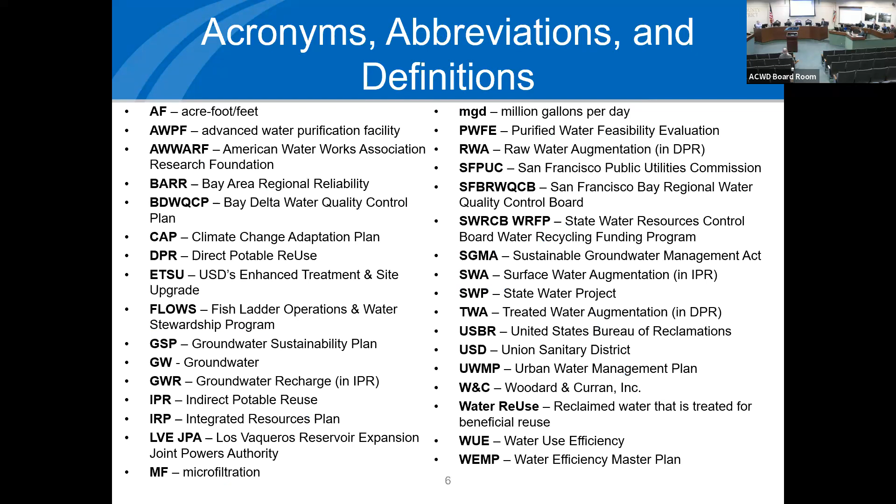And on the next slide, number 6 includes a list of acronyms you may hear today for quick reference as needed. To cover our first topic tonight on the Los Vaqueros project, I'm pleased to turn it over to my colleague, John Wunderlich, Director of Finance and Administration, and the district's alternate to the Los Vaqueros Reservoir Joint Powers Authority.

Great, thank you, Ms. Hidas. Good evening, or good afternoon, members of the board, staff, and public. I'm pleased to speak with you about this project and provide some updates on where we're at. So, if we can go to the next slide.

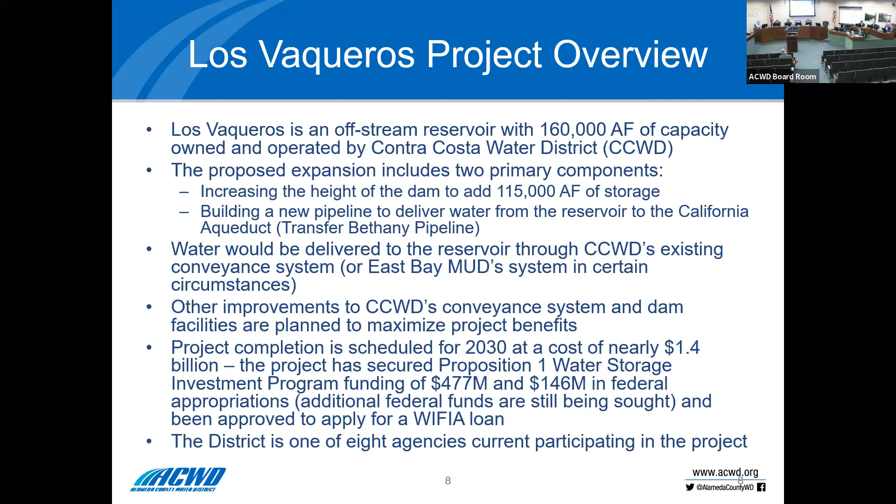Maybe we'll go one more slide, so we're looking at a graphic a little bit while I talk through it.

Basically, the Los Vaqueros Reservoir is an off-stream reservoir owned and operated by the Contra Costa Water District. It currently holds 160,000 acre feet of water. Essentially, the project is proposing to increase the size of the reservoir from 160,000 acre feet to 275,000 acre feet. The district is one of several partners participating in this project.

Essentially, the way it would work is that partners would use Contra Costa's existing conveyance system, as well as, in some circumstances, East Bay Municipal Utility District's existing conveyance system, to take water and put it into the reservoir and then also take delivery of it. The two major components of the project are, of course, the increase in reservoir size, increasing the dam height to store more water.

The second major component of the project is a new conveyance facility, the Transfer Bethany pipeline, that would take water from the reservoir, represented by the green arrow on the graphic here, down toward the California Aqueduct.

It would connect right above the Bethany Reservoir, but below the Banks pumping plant, which is critical because the ability to use that water would not be governed by restrictions at the Banks pumping plant.

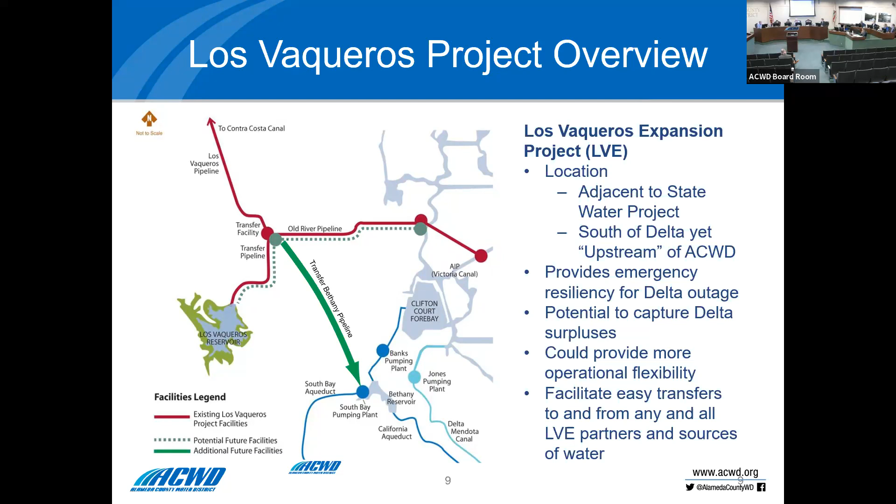So it's a great regional project that provides a lot of opportunities. Next slide.

So what we've done is formalize the governance of the project with those other partners. About 1.5 years ago, a joint powers authority was created, and it meets monthly. Board President Sethy is the district's representative to that JPA.

The JPA also has committees that are evaluating key issues for the formation of the project, and the district is represented on 2 of those committees. Director Sethy also serves as the treasurer of the JPA and is on the finance committee.

And I represent the district on the operations and engineering committee.

Last year, Taryn Ravazzini was appointed as the executive director. She's a consultant to the JPA; the JPA itself does not have any direct employees.

The JPA is currently in the process of really staffing up the support for Taryn in her role as executive director, and in particular we're looking for some program management consultants to come on board soon.

That will provide a lot of expertise and support for the engineering and operational aspects of the project, and specifically in overseeing the work done by Contra Costa Water District.

Where I'm going to focus most of today's discussion of the Los Vaqueros project is on all these different agreements and contracts essentially that are being developed, because before anybody's willing to go and spend big money on developing this — which is in excess of a $1 billion project —

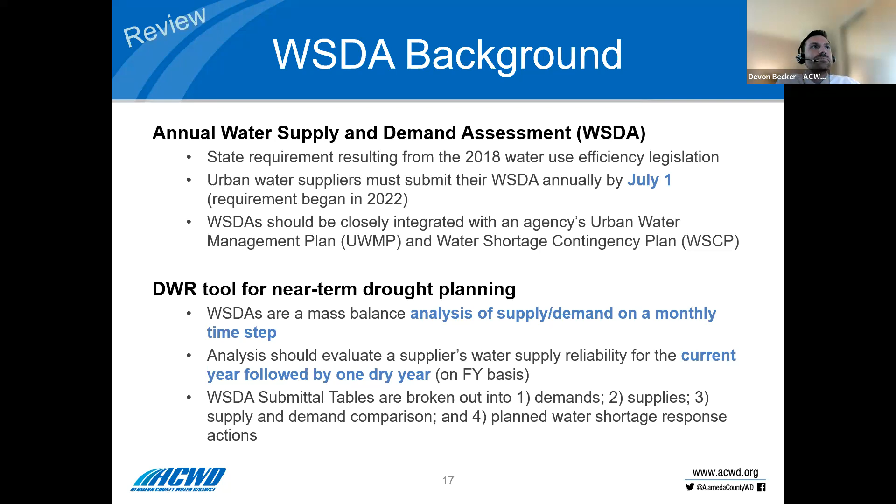Just a little bit more background on the WSDA methodology. The procedure for compiling the WSDA is outlined in our water shortage contingency plan, which was last updated in 2020.

We use existing modeling tools. ACWD uses our production optimization model, which is a 2-year model that incorporates unconstrained demand forecast, our current water supplies and constraints, and a subsequent dry year water supply and constraint scenario. We take that from our most recent UWMP single critical dry year, which in this case is 1977.

The production optimization model incorporates infrastructure capabilities and constraints, and it starts with initial groundwater conditions, then simulates those conditions on a monthly time step throughout the model. Lastly, WSDA methodology has us rely on our water shortage contingency plan for any shortage response actions corresponding to a shortage level.

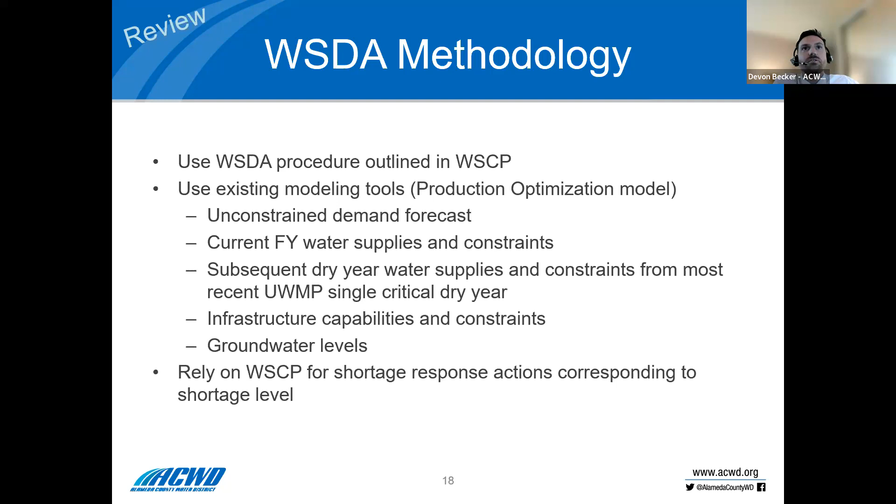So this is maybe the most important slide. The WSDA is really just a compliance requirement for ACWD. We do not use it as a planning tool. As Mr. Nizer mentioned, this is just a stress test, and the requirements dictate the use of hypothetical data assumptions.

So the idea is that this next fiscal year is going to mimic 1977 water supply conditions, when we know right now, looking forward, that's certainly not the case. We have 100% Table A allocation for this calendar year, a full San Francisco system, and our local groundwater basin is also full. So we know that this next fiscal year will not look like 1977, and yet that's what we're required to do for this analysis.

So just to reemphasize in a different way, ACWD's near-term water supply planning is far more realistic and informed, and that's what we use internally. Typically the WSDA analysis is presented at the Water Resources and Conservation Committee, with the general manager authorized to approve the report prior to submission to DWR.

So this is a busy slide, apologies. This is a snapshot from the draft analysis for the report submitted to DWR. On the top you see potable water shortage assessment, and this is for the following fiscal year if 1977 water supply conditions were to recur, which we know they're not.

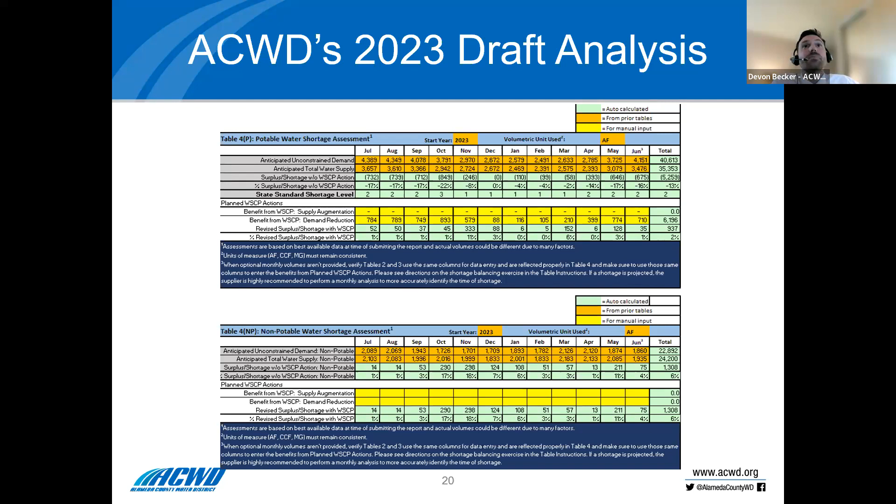So our draft results, just to summarize: there are no water shortage response actions required for 2023. The table we just looked at was for the following fiscal year, but I will say, and this is no surprise based on our current water supply situation, through the end of this current fiscal year we do not anticipate any shortage whatsoever.

As outlined in our 2020 water shortage contingency plan, the results of the WSDA will only trigger actions under the following circumstances. If a shortage is identified for current year conditions, fiscal year 22-23, then the procedures outlined in the district's water shortage contingency plan for that level of shortage will be followed. Otherwise, no actions will be triggered. Since we don't have any shortage through the end of this current fiscal year, we don't have any shortage actions that we need to put in place.

That's no surprise. The second bullet on this slide reiterates the table results we saw: for the following fiscal year, 23-24, the 1977 water supply reliability or availability would result in a 13% shortage. Our stage 2 actions would be sufficient to avoid a shortfall. But again, we're not required to do anything based on that analysis. All we have to do is submit those tables to DWR for compliance this year. So, next slide.

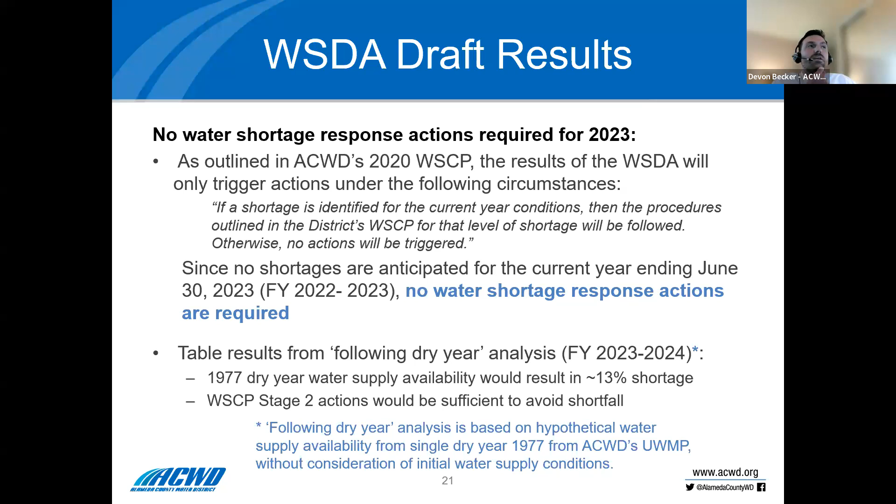This is the last slide, showing the next steps. Staff will finalize the WSDA analysis and present it to the general manager for approval, and then we will submit the WSDA report to DWR by the July 1st, 2023 deadline. With that, I conclude the presentation this evening, and I'm happy to take any questions.

Thank you, Mr. Becker. Wish you well on whatever new pursuit you're going after. We'll miss you.

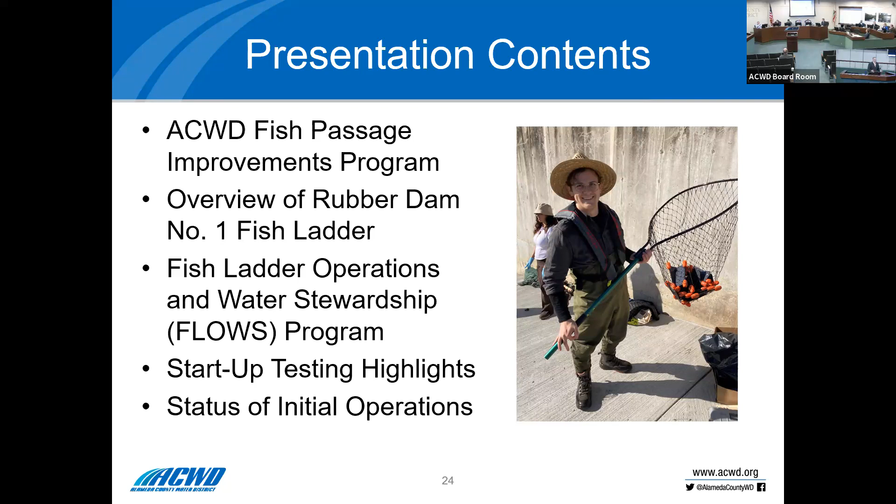A brief review of our fish passage improvements program, as well as a more detailed overview of the Rubber Dam #1 fish ladder. Then we'll transition over to Ms. Oshiro, who will provide a summary of the fish ladder operations and water stewardship, or FLOWS program. And then we'll close it out with some highlights from our startup testing and the latest from our initial year of operations.

So as a brief overview, more for the public than for those in this room, I wanted to provide context for these projects. What you see in green as well as white, outlined in black line work, is the Alameda Creek watershed. After the Sacramento and San Joaquin watersheds that feed through the Delta, this is the largest watershed feeding into the San Francisco Bay. 633 square miles extending from Contra Costa County down to Santa Clara County, and east you'll have to drive through the Altamont Pass to get out of our watershed. It covers a wide range of terrain, from completely undeveloped land and ranch land, to significant residential development in the northern part of the watershed.

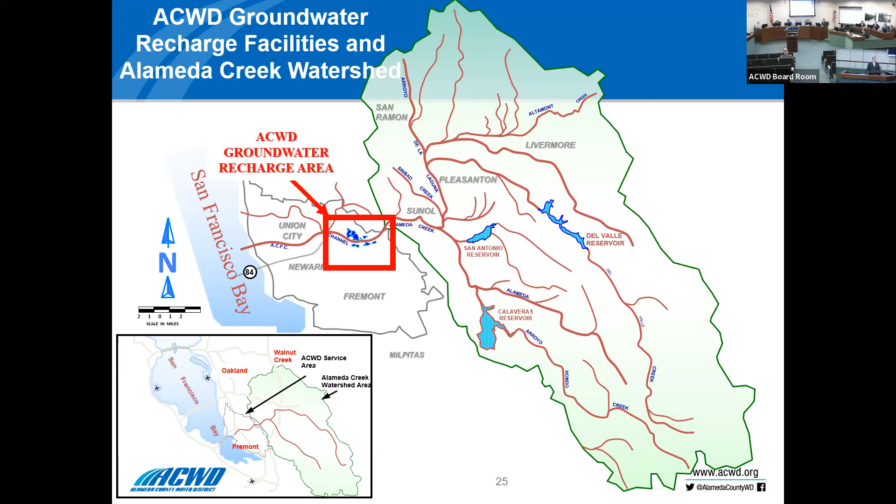With the next slide, I want to provide an overview of why Alameda Creek is important to the water district. Being on the creek, I hear this question quite a bit from customers and trail users: what's the connection between the water district and fish passage facilities in the creek? Alameda County Water District gets 40% of our water supply portfolio from local supplies, namely from the Alameda Creek watershed. In general terms, about 30% of that we pump from our groundwater, and about 10% is local supplies we get through water rights at Lake Del Valle.

Also, the water is critical for our replenishment of the Niles Cone groundwater basin, and the creek itself provides the public with several opportunities for recreation, habitat for wildlife, critical flood control, which we saw this winter was very beneficial to our service area. And it provides an aesthetic and environmental value.

It's part of the Water District's mission statement to be a good steward of the environment, and that's why we're a proud founding member of the Alameda Creek Fisheries Restoration Work Group. Our objective in participating in the work group is to support that fisheries restoration while ensuring reliability of our critical water supplies. Overall, the Fish Passage Improvements Program is not just one project, it's several projects that have spanned many years.

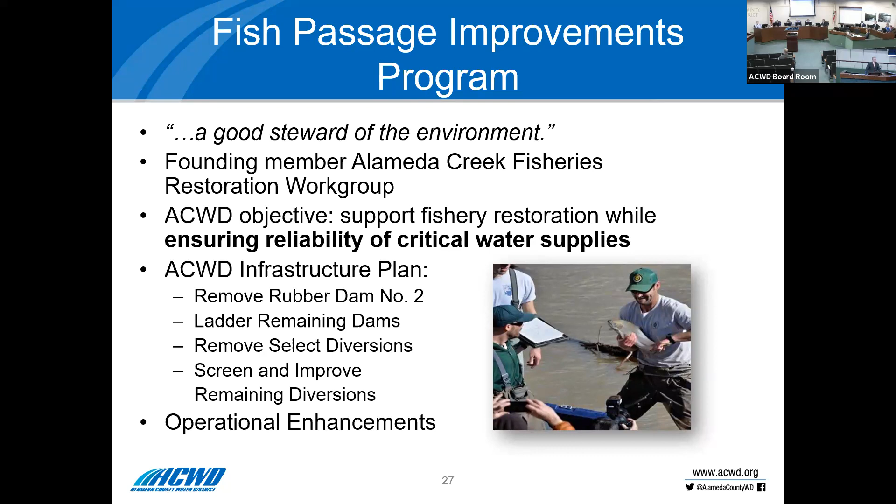We're finally at the point where we can put the capstone on this program, with the completion of the Shinn screened diversions, as well as the Rubber Dam #1 BART weir fish ladder. It is our hope that through these new facilities and screened diversions, we'll be able to provide some operational enhancements that will ensure the reliability of those local supplies well into the future.

I'll give a very brief overview of the conditions before construction of Rubber Dam #1 and the drop structure, the BART drop structure ladder. Going from left to right, you'll see the BART train tracks, that bridge that crosses the creek, and Alameda County Flood Control's drop structure, comprised of a 22-degree slope that's 9 feet high and 40 feet long.

At the bottom of that slope are what we affectionately call the Dragon's Teeth, 4-foot high energy dissipators that are used to slow the flow of water, dissipating the energy before that high flow of water reaches the piers that support the BART bridge and tracks.

Lastly, I should mention Rubber Dam #1 is towards the right. That dam is inflated, creating an impoundment that then allows us to do diversions of our local supplies through screened diversions upstream.

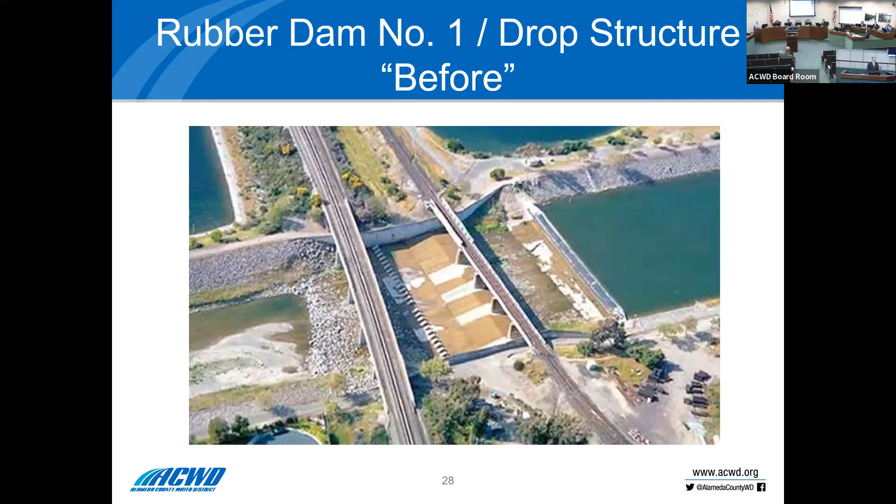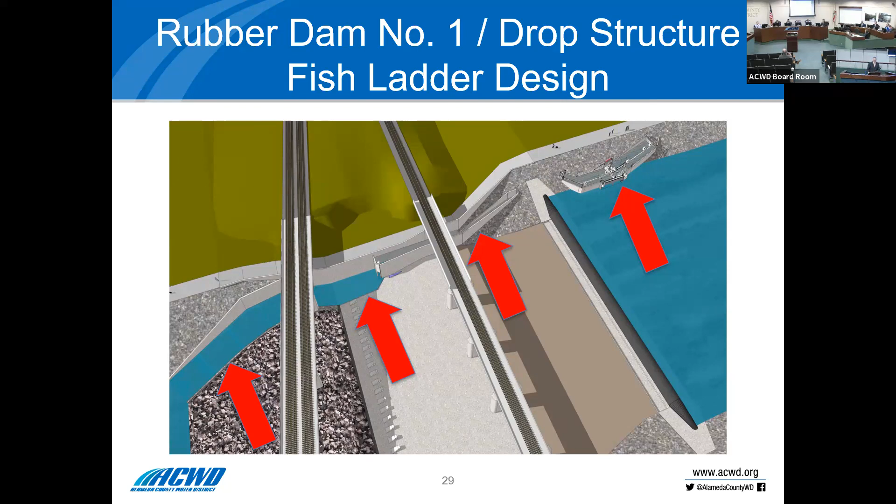A lot of the terminology I'll be using today regarding exits and entrances is from the vantage point of an in-migratory fish, an adult fish swimming up into the watershed. So it's very confusing, but I just wanted to provide that caveat.

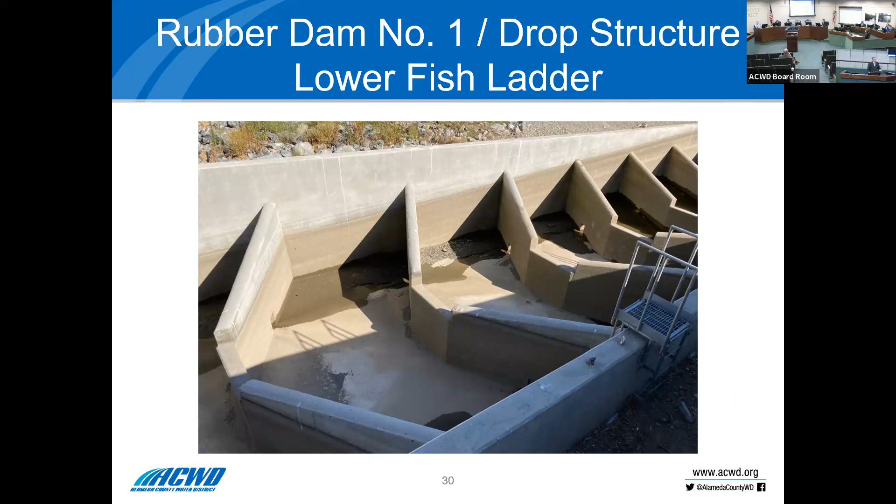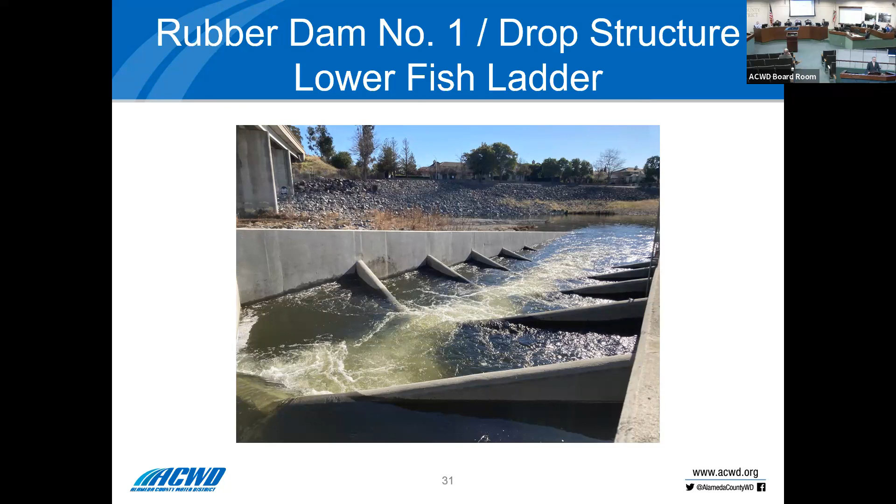I'll start with the lower fish ladder. This is a vortex pool and chute design, a very passive structure. There are no valves that need to be operated, and there's no monitoring equipment in this portion of the facility. When it's filled with water, it provides a cascade of 1-foot drops that allow water to flow downstream and in-migrant fish to easily pass through a wide range of flow conditions.

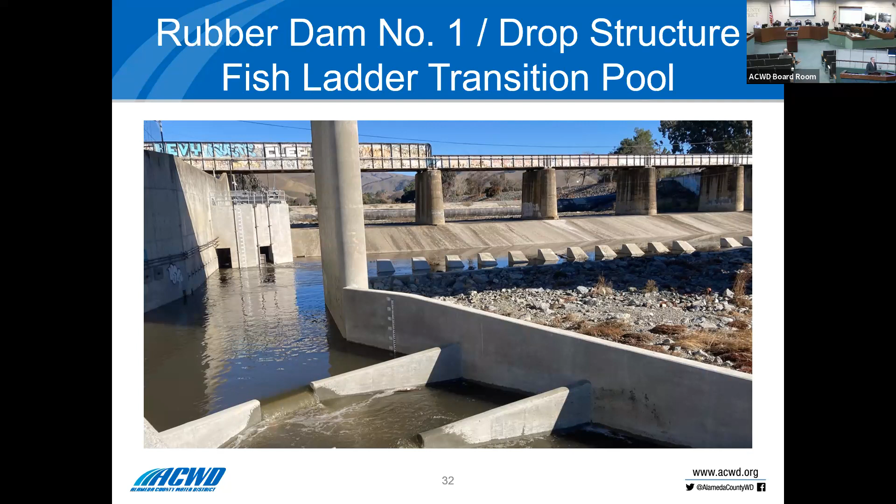I want to highlight the transition pool that's located between the upper and lower fishways. That transition pool provides a low flow channel, and in higher flows, as you can see in this photo, water can actually span the entire width of the flood control channel in that general area where the Dragon's Teeth are located.

This is the most complex portion of the fish ladder, so I really wanted to provide a more detailed view into the ladder. It's very difficult for members of the public to understand this facility. If you're standing on top of it, you just see a bunch of grating. If you're standing on the opposite side of the creek, all you see is a lot of concrete.

So what I provided here along the top is sort of a cutaway profile of what the upper portion of the fish ladder looks like if you were to basically saw it in half. The photo underneath just shows the concrete walls. Again, if you're on the opposite side of the creek, you don't see much. The concrete walls are sort of that tan color in the profile at the top.

The black oval is Rubber Dam #1. You can see that part of this ladder is located downstream of RD1 and part of it is upstream of RD1. The black line that you see generally towards the top is the grating, so as you walk along the top of the ladder, there are some portions where the grating goes down behind a concrete wall.

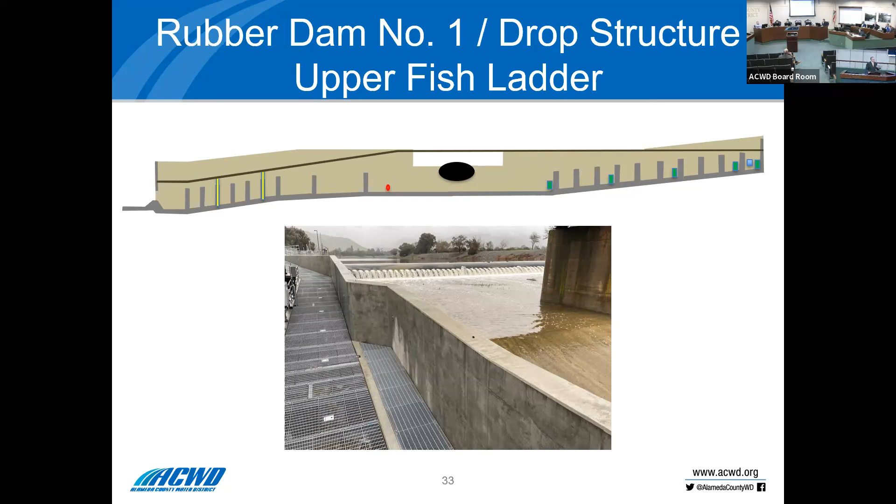With the next slide, I wanted to highlight the vertical slots. The stairs or steps within this ladder are created through hydraulic design so that each pool provides a 1-foot head drop from one pool to the next. And the way that it achieves that is through these vertical slots. So there are 2 concrete walls with a 1-foot gap between them, and water flows at a range of flows through there, providing the maximum hydraulic jump of 1 foot, which allows in-migrant steelhead and in-migrant salmon to swim upstream.

If you could just go back 1 second, I did want to highlight those blue-green rectangles towards the right of the profile. Those represent the locations of the exit gates, and those exit gates allow us to operate this ladder at a range of impoundment levels. So if the impoundment is completely full, we'll have the rightmost upstream exit gate open. If you think of an extension ladder you have at home, fully extended — it's a concrete facility, so it's very hard to move around easily. So instead we have a fixed structure, but multiple top rungs of the ladder.

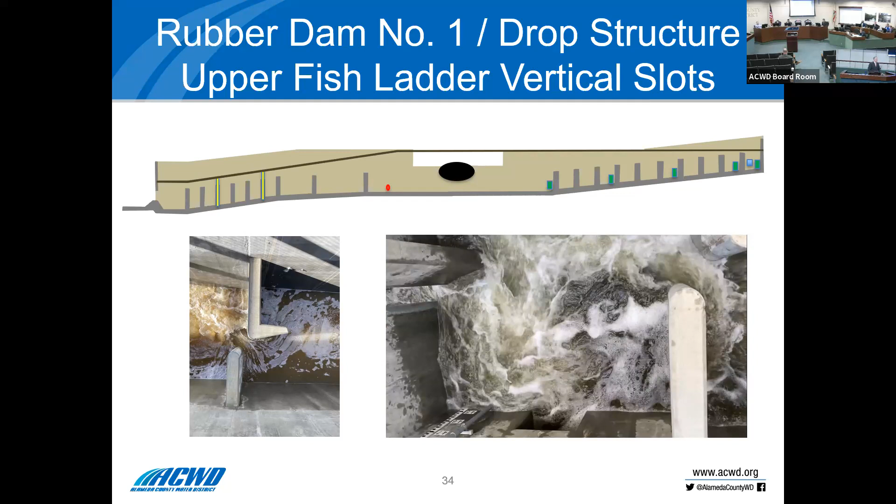And then exit gate number 1, which is the 5th from the right, is the lowest exit gate that we can operate. So again, this allows us to operate from a completely full impoundment down to no impoundment at all. The dam could be completely deflated and that upper fish ladder can still be functional to provide for passage.

With this next slide, I wanted to highlight some of our monitored equipment. This monitoring equipment is exclusive to just this fish ladder — we don't have this equipment in our fish ladder at RD3. What you see with that red circle just downstream of the black oval representing RD1, that's the approximate location of a sonar camera. So we have a sonar camera down towards the bottom of that pool, and that provides the ability to capture sonar video that we can later post-process and collect imagery of fish passing through the facility.

And then what you see with those yellow bars towards the left of the profile, those represent the 2 locations where we have 2 sets of pit tag antennas. These are antenna loops. The photo on the left shows the upper loop, which extends from the top of those concrete walls that create that vertical slot, all the way up to the top of the grating and from wall to wall. So that's a complete loop around that opening.

So at very high flow conditions, water is actually over the top of the concrete walls and water is flowing through that upper loop. Now we also have the lower loop — it's a little harder to see because the photo is taken directly down looking at that vertical slot. But that lower loop fully encircles that vertical slot, extending from the very floor of the pool along both sides of that 1-foot opening and then along the top of the wall.

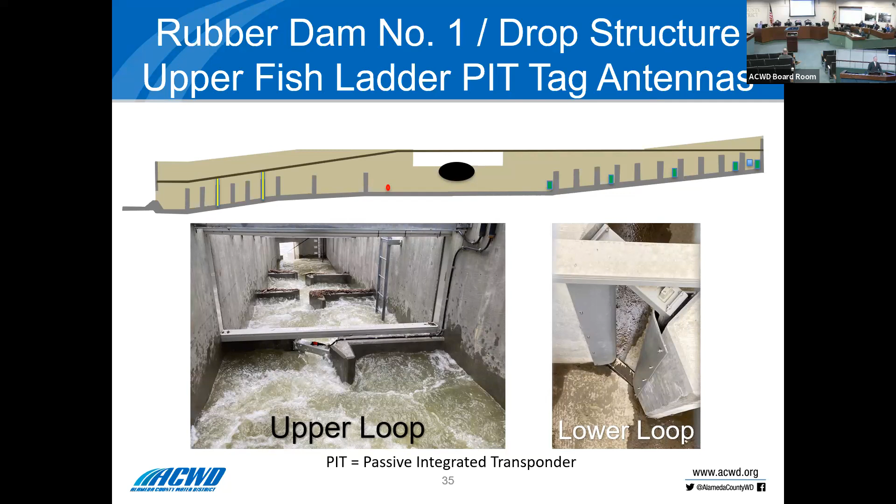With the next slide, I wanted to highlight what the loops are for. On the lower right, you see a photo of a 12 millimeter glass capsule, and inside of that is a bunch of technology, but it's basically a passive transponder. When it passes through an electromagnetic field created by our antenna, that transponder emits a unique identifier that is captured by the antenna and recorded by a computer and then uploaded to the cloud. So from my phone, I can keep an eye on whether there are tags being detected by our antenna, and of course we have a database, so we can always go back.

I'm not looking at my phone all the time. Can I get that app for my Christmas present? We're gonna collect the data.

We'll have an annual report, so I'll give you a one-year snapshot. But as you know, with the press release, we were able to detect the first passage of a pit tag that wasn't a test tag that went through that antenna. I'll get into that later.

The San Francisco Public Utilities Commission, or SFPUC, conducts annual electrofishing surveys across many locations in the upper watershed that's in their jurisdiction. They record the number of fish and the variety of species they collect during those surveys. The electrofishing stuns the fish for a brief period of time, during which they can collect and count them.

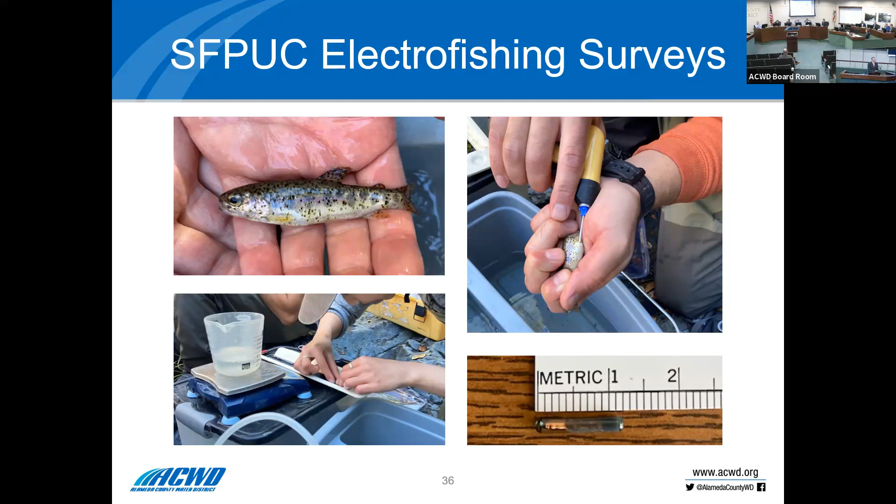For the next portion to talk about our flows program, I'll turn it over to Ms. Kelsi Oshiro, who will explain the flows program. Great, thank you, Mr. Ash.

So just a brief overview of our FLOWS program. FLOWS stands for Fish Ladder Operations and Water Stewardship. The goal is to enhance fish passage in Alameda Creek while maintaining water supply goals on an ongoing basis. ACWD will operate, monitor, and adaptively manage creek facilities in accordance with the biological opinion, or BO, and coordinate program activities with other watershed stakeholders.

This slide has the flow program elements. The first is compliance, which includes compliance with our daily bypass flows, operations of our fish ladders and screens, development and implementation of our adaptive management plan, performing monitoring activities, and submitting annual reports to regulators and grantors per our biological opinion.

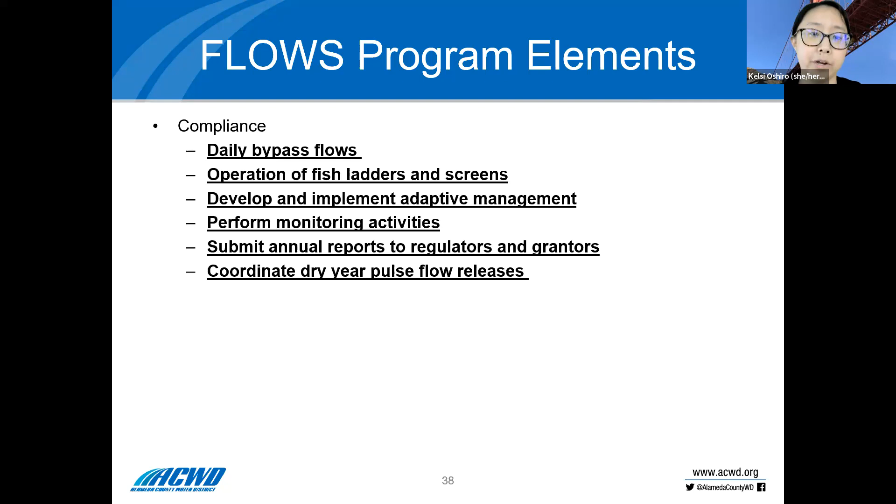Part of that is also coordinating dry year pulse flow releases. Other aspects of the flow program elements include coordination with our watershed stakeholders and regulators for our watershed activities, and we also have a cost share with the flood control district.

For the creek-related community engagement, which is also a large part of our FLOWS program, that includes public education and outreach, as well as participating in community events.

Here's a list of our program elements—I'm not going to read through all of them, but just highlighting that there are several components to the FLOWS program, like previously mentioned, with several reporting requirements as well as testing. Today we're going to dive into a couple of highlights of this program, running through some of our exciting experiences and developments in preparation for startup of operations, as well as what's been happening this first quarter, as Mr. Ash mentioned briefly.

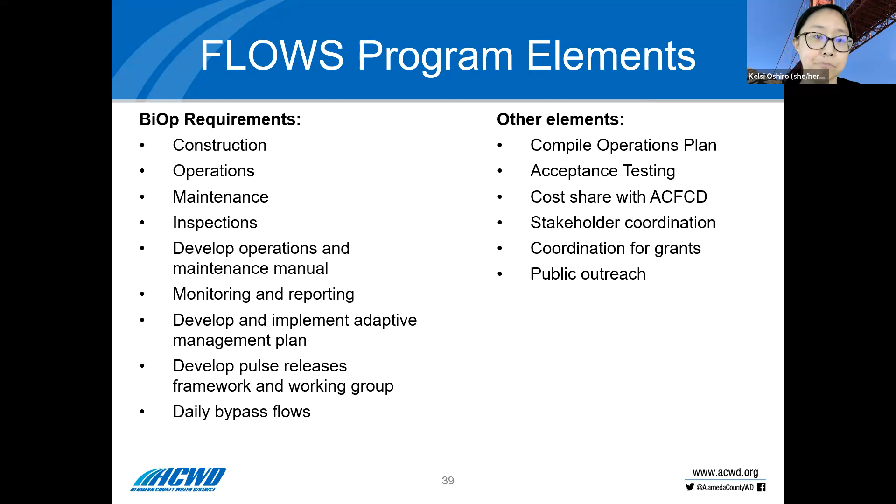Prior to operation, we did startup testing as part of our FLOWS program. The purpose of this startup testing for the fish ladders was to gain operational familiarity with the system controls, operations, as well as our safety protocols, and confirming that our monitoring equipment was properly calibrated. This began as soon as we could, at the end of November 2022, and continued throughout December as well.

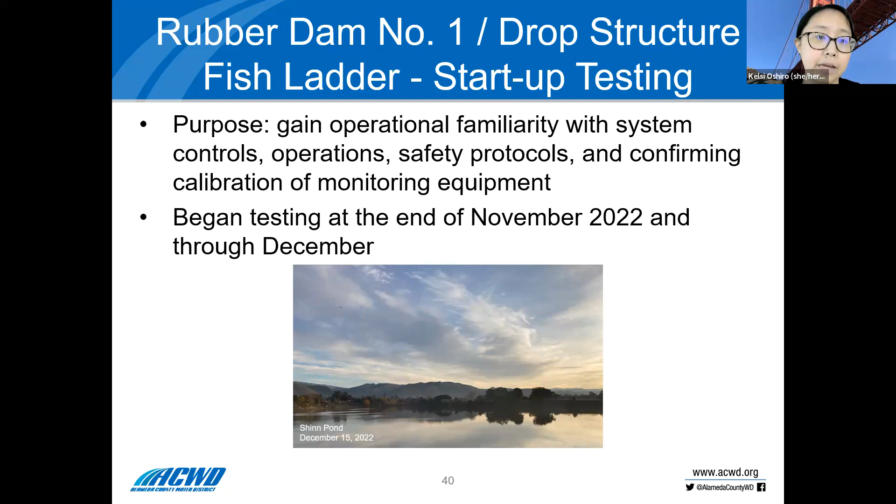As part of the startup testing, one of the very important aspects was making sure that fish passage was being allowed through our fish ladders. This included two important components: head drop measurements and velocity measurements. For the head drop measurements, we wanted to be sure fish could pass safely through the different pools and that the head drop wasn't too large. We simulated high and low flows throughout the fish ladder, collected across a range of flow conditions possible for fish.

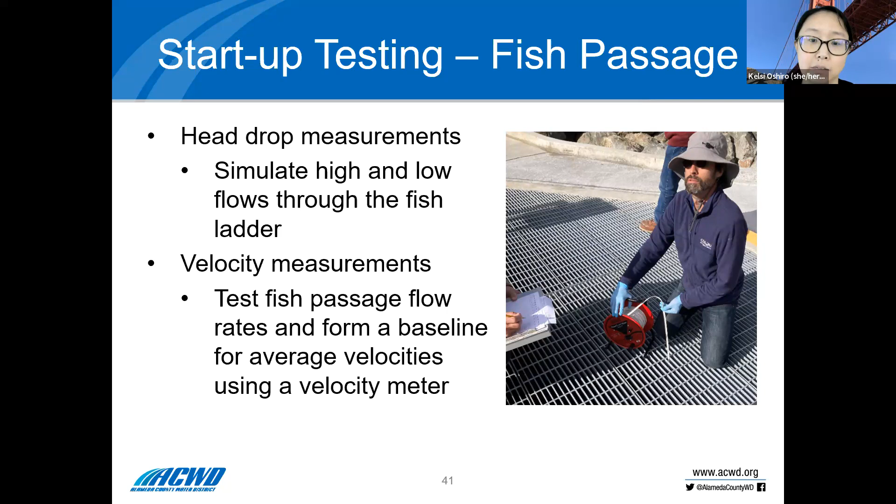Juvenile spillway was also tested. Similarly, velocity measurements were tested, forming a baseline for average velocities within the fish passageways, using a velocity meter. Here to the right, we see our own ACWD staff, Jeremy, assisting with these tests.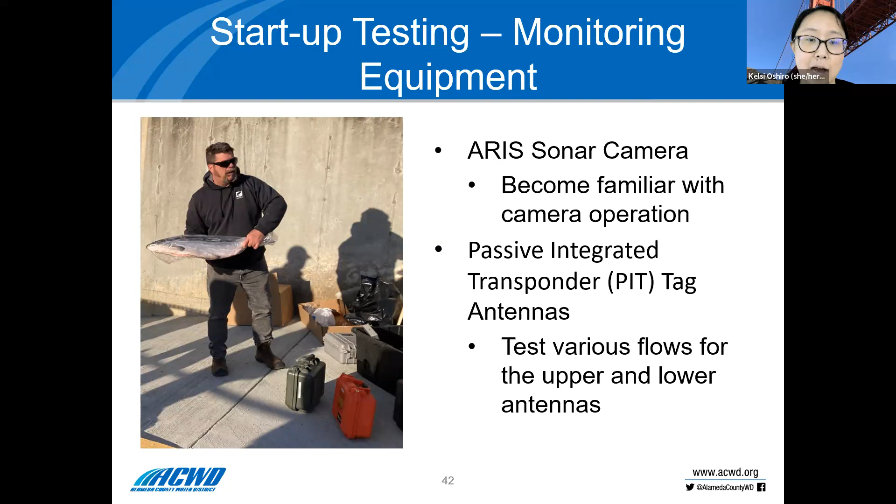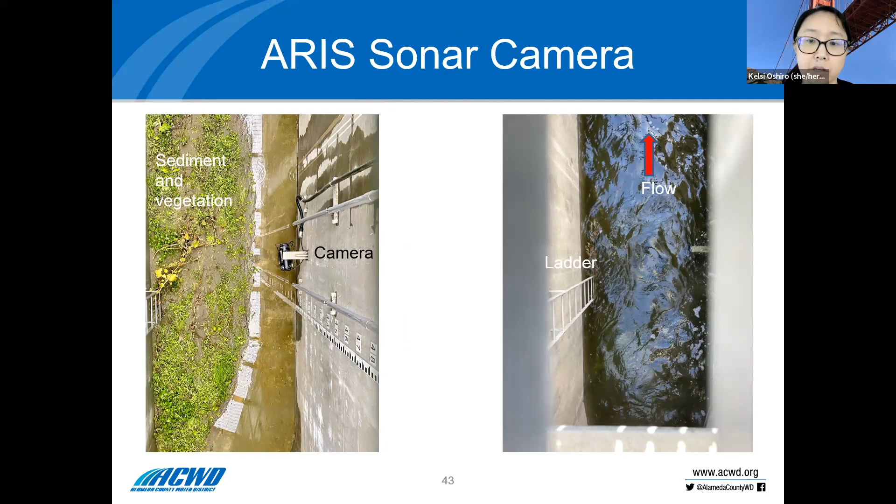A little more detail about the ARIS sonar cameras: here to the left, you see the camera without any flow going through the fish ladder, and to the right, the fish ladder with flow. You see the same ladder on your left, and then the camera currently submerged.

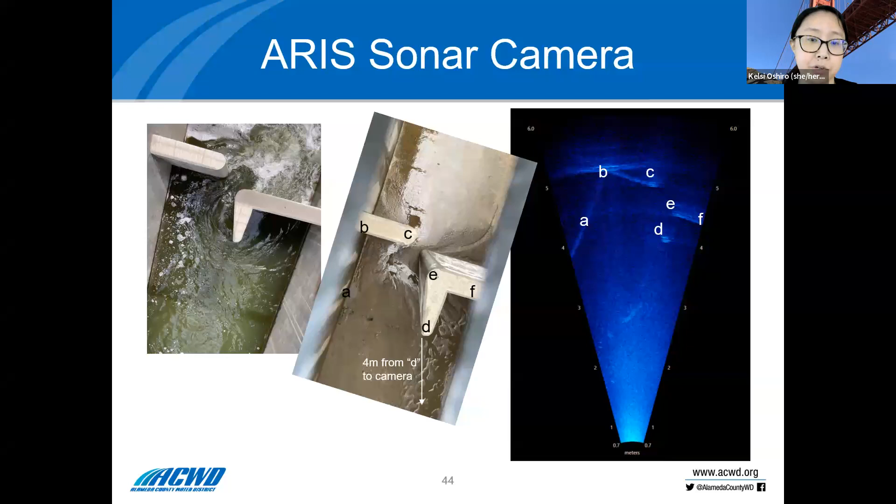Later in this presentation, we'll show a couple of exciting clips from our sonar camera footage. But to orient ourselves here, on the very left-hand side we have a vertical slot, and the picture in the middle has a letter A, which is a little hard to see but marks where the floor level of the fish ladder meets the wall. Going from left to right we have B and C, then D, E, and F on the right-hand side. Point D is about 4 meters from the camera. On this right-hand image, you'll see the corresponding letters A through F, which should help orient us when we get to the videos we'll show you soon.

These were the market fish used for testing of the ARIS sonar camera. A couple of items we use here: you see the float, which keeps the fish oriented and off the channel bottom, and a stadia rod used for taking water depths and holding the weight in place. The larger fish is an Atlantic salmon bought at the market, and the smaller fish on the bottom of the photo is a striped bass. We also have an 8-ounce weight, and we used an aluminum can for the testing as well.

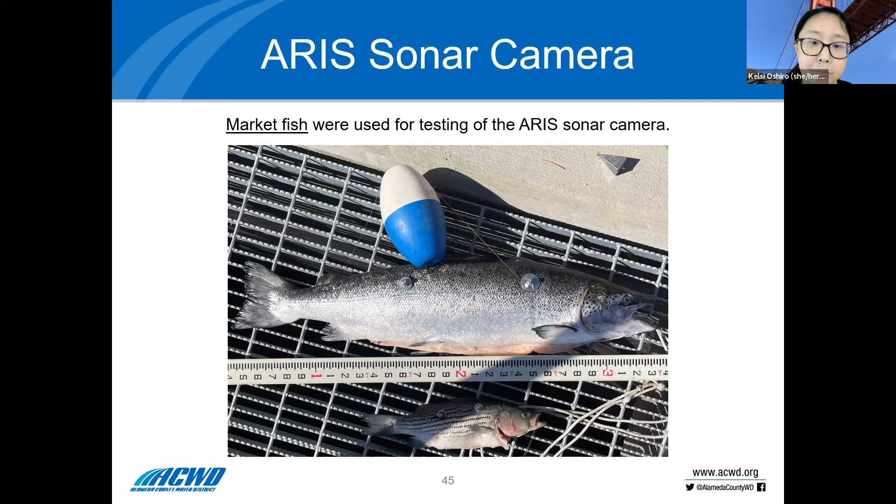This is a bit more orientation for the sonar camera image. You'll see that the Atlantic salmon marker fish has bolts going through it, and here at the top left corner, you'll see the corresponding bolts pointed out with the arrows. You can kind of see the outline of the fish in the image as well.

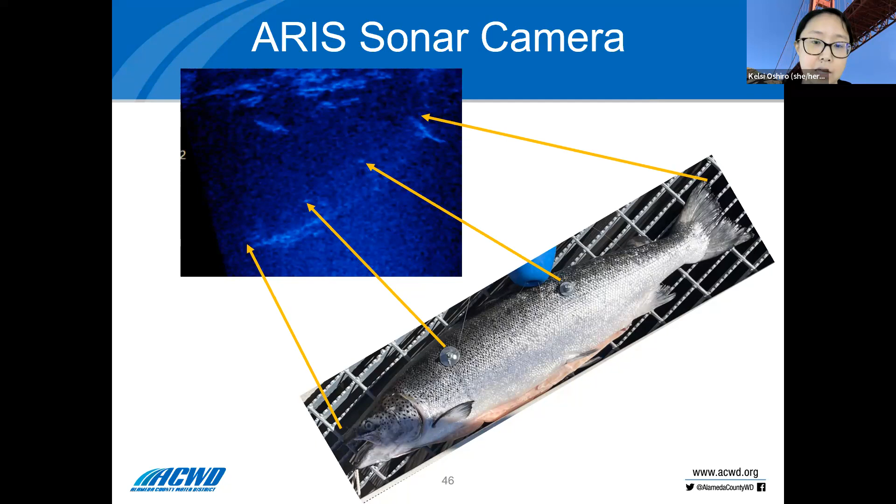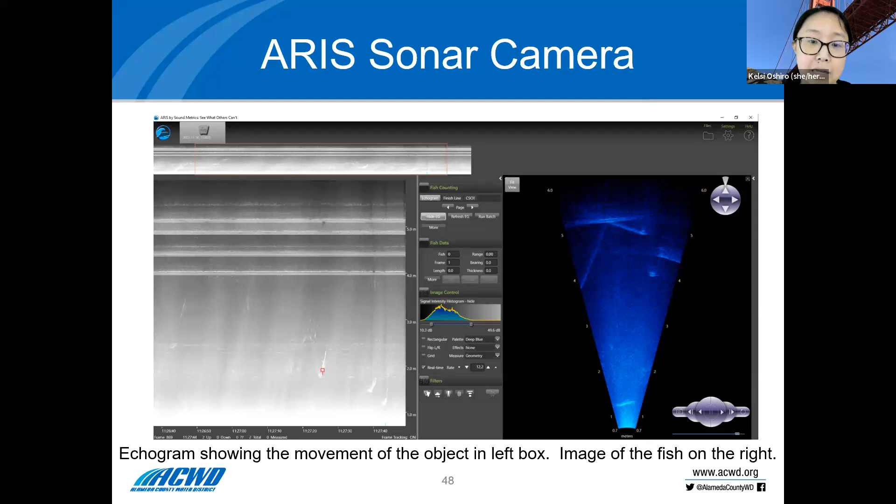Continuing with the monitoring equipment, we tested various flows of the upper and lower antennas for the PIT tag antennas. The photo on the left shows the floats, the orange items, and each of these have a pit tag in them. The pit tag itself is similar to what you would microchip your cats and dogs with, so they're very tiny, as Mr. Ash has shown. The photo on the right shows East Bay Park staff dropping these floats individually into the ladder upstream of the antenna.

We have great coordination and collaboration with East Bay Parks and other regulatory agencies, and we definitely appreciate all the great teamwork with them.

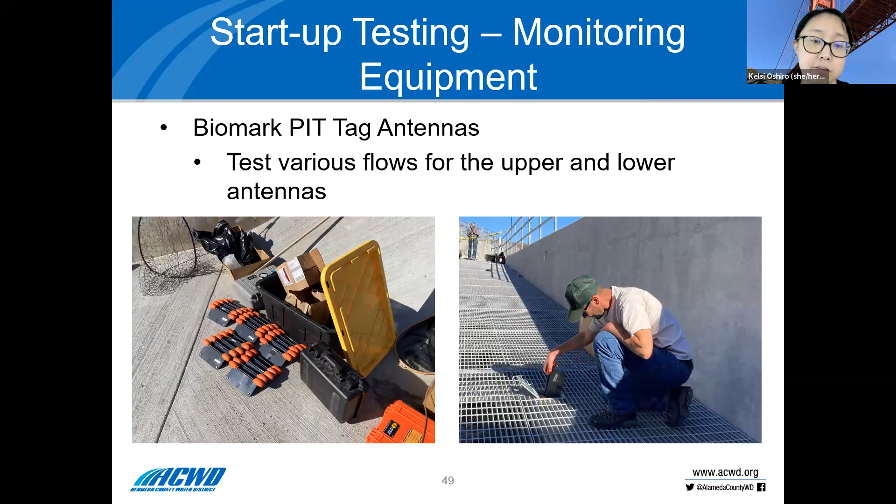The summary of the results of our pit tag test is that we had 50 test tags, and all of them were detected on at least one of the antennas, while 39 tags were detected at both antennas. Compiling and comparing all the data from the test, it was estimated that we'd have a 98% chance of detecting a tagged fish going to the ladder. So it was great results that we got from the pit tag tests.

Other tasks we did during startup testing included going through the daily data collection processes. We have several data sheets that our water controllers go through daily, so there was some training on that as well as getting feedback. We're very appreciative of all the hard work the water controllers have been doing. We also looked at refining fish and predator monitoring observation protocols and procedures, and we are working with the resource agencies on that as well.

Thank you, Ms. Oshiro. As she mentioned, it was quite a bit of effort to confirm the physical and monitoring equipment was operating effectively prior to our January 1st start of our biological opinion. In a short order of 5 weeks, we had a lot of components to test under a wide range of conditions, focusing mostly on what was anticipated for the period from March through May. It was a very successful series of tests. We were able to confirm that the hydraulic design from our project engineering staff was spot on, and the system performed as we anticipated. It was a big sigh of relief that we were entering into 2023 with a functioning operational fish ladder that would not harm but provide passage for the fish. So we're ready to go.

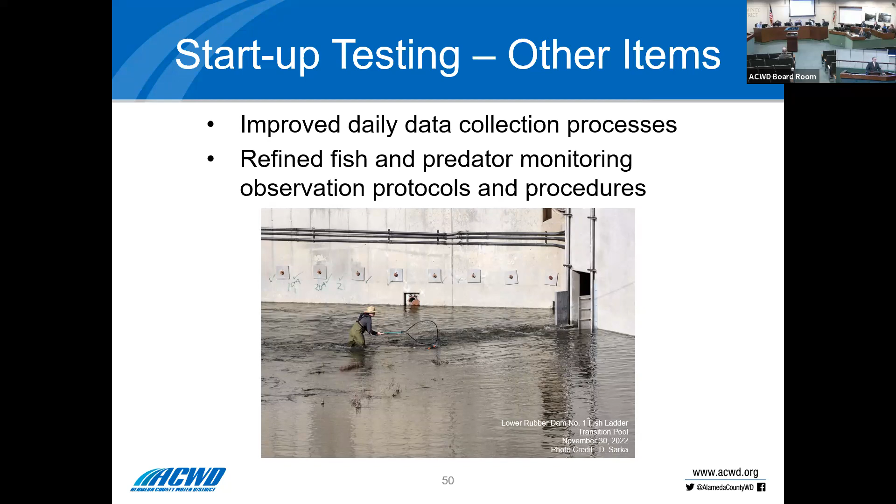On the next slide, I'll show you the hydrograph. You can see the flows in Alameda Creek. This is from the Niles gauge from USGS, just to give you an approximate indication of what the flow rates were in Alameda Creek since the biological opinion became effective January 1st. What you see are very high flows.

An important line to look at is the 1000 CFS line and the 2000 CFS line. That rough band between those lines represents higher flows, where the ladder has to be shut. At lower flows, we could open the ladder theoretically. We wanted to be mindful not to damage the new facility right out of the gate, so we were very cautious.

We did operate for part of one day on January 8th, during a brief interval between atmospheric river events, and luckily there were no Del Valle reservoir releases, so the flows dropped off just enough. Remember, we were thick in a drought, so we were trying to capture as much water as we could, not knowing this was going to be a long winter. So we did operate for one day—we were able to raise the dam, divert some water, and run the fish ladder for part of that day.

High flows continued, especially with the successive atmospheric river events and the subsequent reservoir releases up in the watershed. So it wasn't until later in January where we could really operate the fish ladder for an extended period of time. We did have some higher flows again with more rain, and we have been operating continuously now since March 25th.

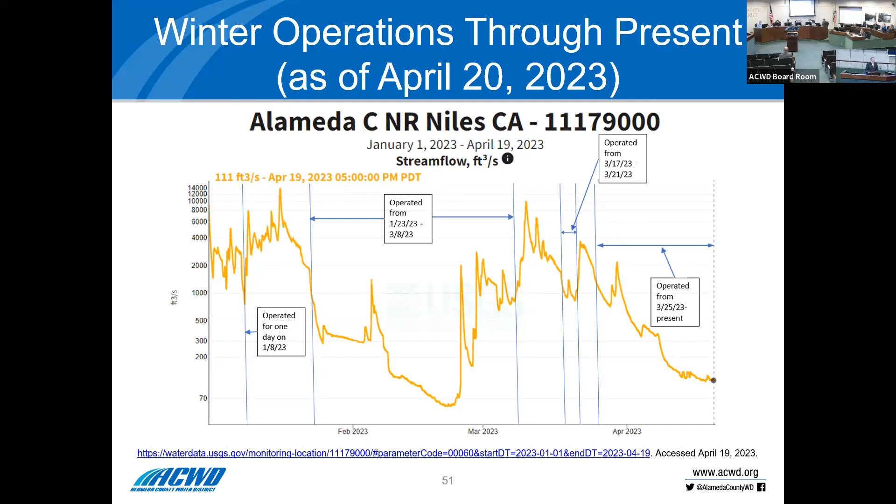One of the things I would like to highlight is that while I have the pleasure of presenting today, it really is a team effort. We had a lot of requests for assistance from our engineering department staff as we were responding and trying to understand a new facility, responding to issues from the construction, and also from our facilities maintenance division and operations department, helping us respond to issues that the wet weather presented—not just to the new fish ladder facilities, but to a lot of our groundwater recharge facilities. So a huge thanks to a district-wide effort to provide safe fish passage and replenish our depleted groundwater subbasin.

Early on, we did see Chinook salmon, as you might remember, in October of 2021. The ladder was not completed, so the BART weir was still a permanent barrier for passage. We had quite a number of Chinook salmon—we estimate around 60 or so on one particular occasion—that couldn't pass. So they spawned downstream of the BART weir and perished in that location.

A better news story for them this past winter: because the ladder was operational, we were able to observe salmon in the ladder, very high up, giving us increased confidence that there were perhaps other salmon we didn't see that might have made it all the way through this ladder. Keep in mind, RD3 was inflated, so they also had to get through the ladder at RD3.

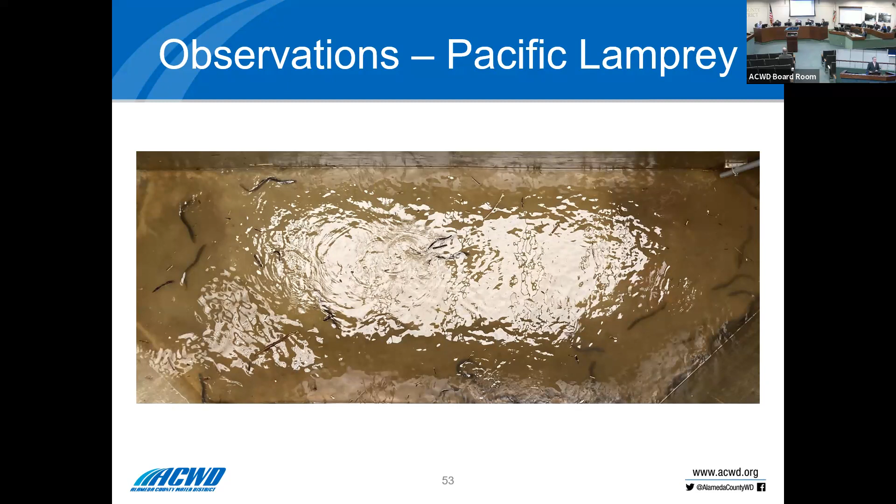And there are species mentioned in our biological opinion. And now for the icing on the cake, I'll pass it back to Ms. Oshiro, who has some video clips to show you from our sonar camera. Great, thank you, Mr. Ash.

If you go to the next slide, this is another video they had, and you'll see those light green bands kind of highlighting where the fish is going. You see it moving through the slots there. It's very brief, but definitely very exciting. Just like Leonard said, it's showing that our monitoring equipment is working, and that fish are moving through our fish ladders, and it's just been a great success. It's been really exciting to see all of this for the last quarter or so.

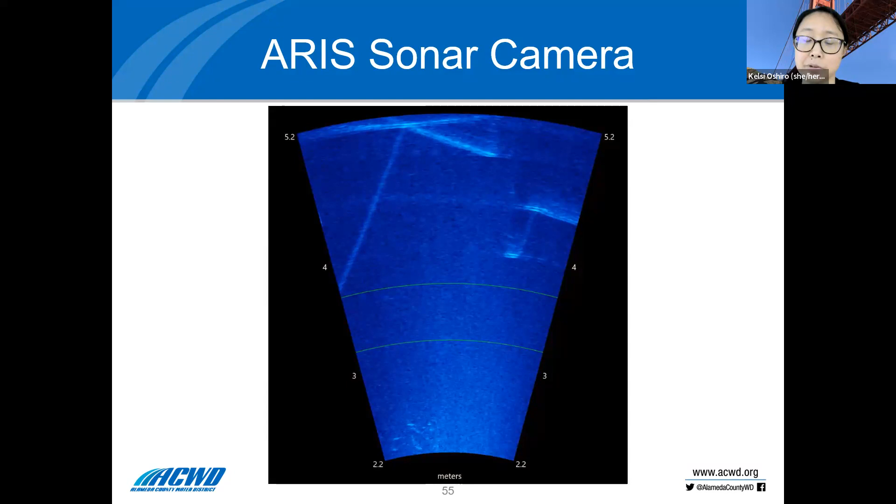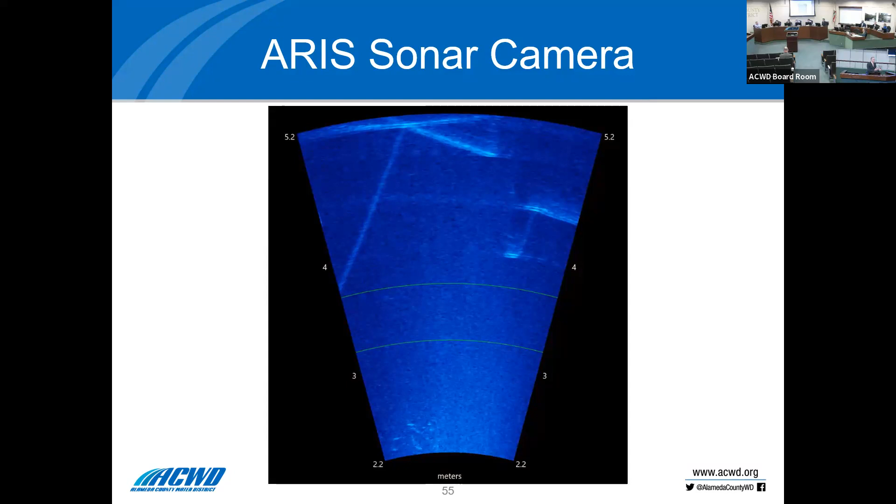All right, thank you, Ms. Oshiro. As I mentioned, this video is post-processed, so we collect it at the site. We have to physically bring the hard drive devices back to the district and then share them with our fisheries biologist consultant. So we expect that the vast majority of the video we've captured will be processed during the quieter time in the summer. Right now we continue to collect the video, but we're not actively monitoring it until the end of our season.

With the next slide, I just wanted to highlight that since the start of our operations, we couldn't have asked for a better start as far as confirmation that the district's investments in time and energy are already paying off. We've seen Chinook salmon during the in-migration season. We've seen Pacific lamprey during the in-migration season. And as of last week, we were able to identify a PIT tag associated with a juvenile O. mykiss, indicating that perhaps this juvenile has been out-migrating during the out-migration season, which is generally April and May.

The one thing we're still waiting for is confirmation that adult steelhead used the ladder during the in-migration season. What would be super ideal, maybe several years down the road, is for one of those adult steelhead returning to have a PIT tag indicating that it started off as a juvenile in the watershed, left, and has returned. So it may be a while before we get that checked off the list, but that would be an ideal confirmation that the complete cycle has occurred.

Again, I do want to acknowledge the district's commitment. This is not just a one-year commitment. We've gone through several iterations of this board that have been supportive of these overall projects in the Fish Passage Improvement Program, several general managers, and lots of staff, too many to count. But I did want to highlight our engineering staff for managing very complex designs and very complicated multi-year construction schedules.

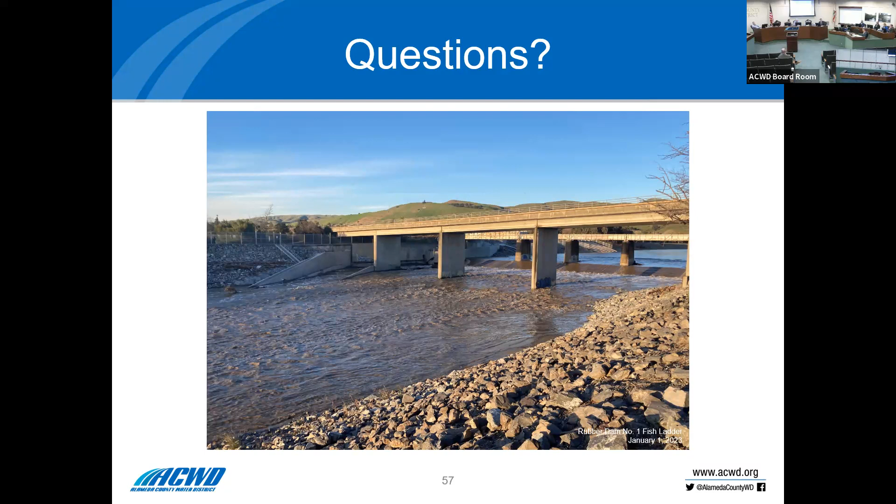Okay, good. So this is just a quick touch point that we wanted to share. The board will recall in October we had our very first workshop on the climate adaptation plan draft report to the board. So we're just here today to provide a quick handout and update to the board on what has been prepared for the public.

So the board's aware we finished our climate adaptation last workshop. We saw the results of the study. Part of that project was to prepare what we called a public facing document, just a summary document. It's really just trying to convey to the public that yes, we're aware that climate change is happening. We do get those questions, actually more accusations. Yes, we're aware of it. We are studying what it's going to do to our long-term reliability and our planning, and we're trying to incorporate adaptation today, so we're trying to be proactive about it. We wanted just to hand out a copy of this tonight. This is the public-facing document, public summary document. The public affairs team has been waiting for us to hand this out because they want to put it into circulation.

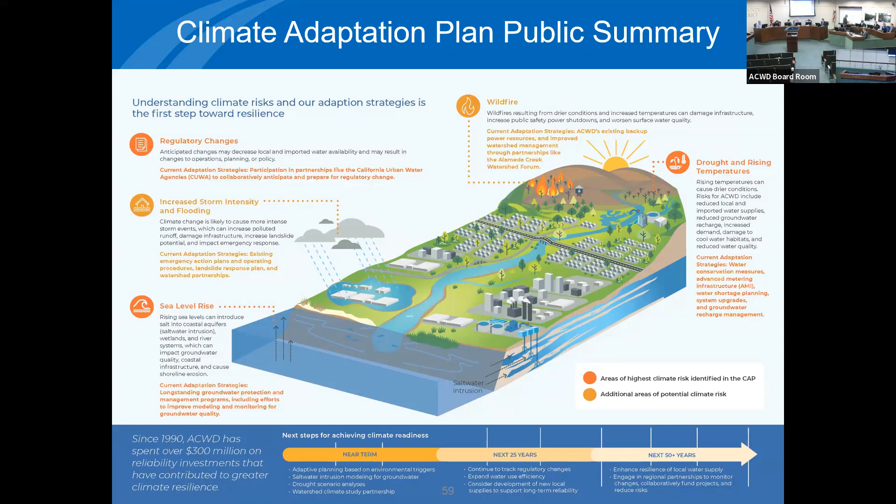And there's really not much more to share about that, other than it's just a high-level summary meant to be graphically communicative and provide information where to find out more. People are interested. Great, thank you, Mr. Nizer.

Quick question. Do we have an estimate of our planning assumption for how high sea level rise will be? We had a consultant that suggested it would be 7 feet by 2100. To be honest, I don't remember the numbers off the top of my head, but we use the uniformly accepted numbers developed in their report, and those are revised periodically. Do you have any idea what that number might be? Not off the top of my head, sorry.

I have one question. How did we arrive at the fact that since 1990, we have spent over 300 million on reliability investments? Do we have documentation to back that up? That is a number we prepared as part of a CUWA white paper on investments in water supply reliability. By the nature of being integrated resources investments, they are by virtue adaptation measures in terms of our ability to handle drought and reductions in any of the other supplies. That was a white paper we did, I'll say about 10 years ago, with CUWA.